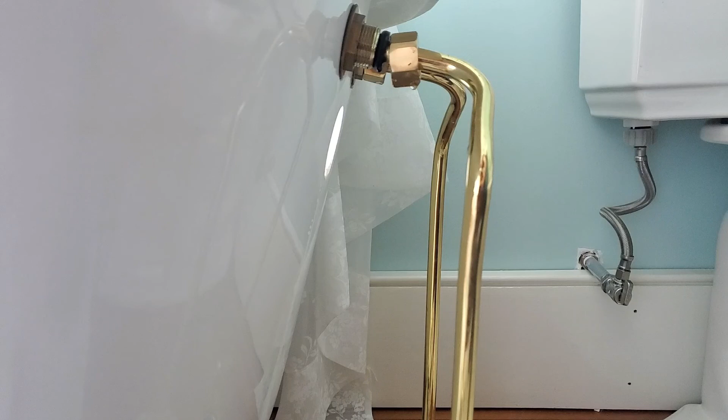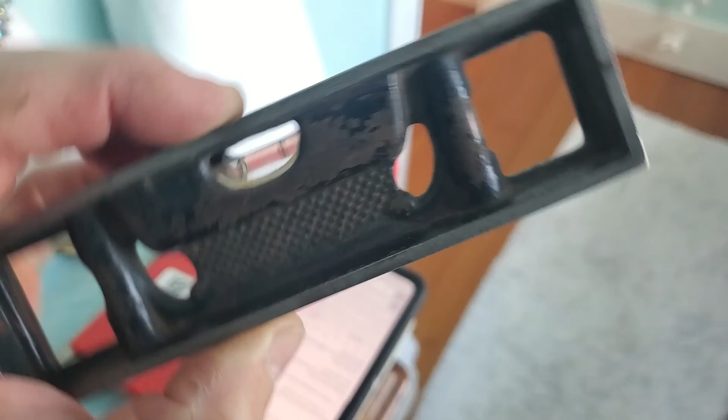Okay, we have a slightly oval hole in the tub, 2 inches wide by 1 7/8 tall. And we have to get the angle of that back face of the tub relative to vertical. I'm going to use a combination of my protractor and a Starrett level, which has bubbles on both horizontal and vertical axes, to estimate the angle from vertical.

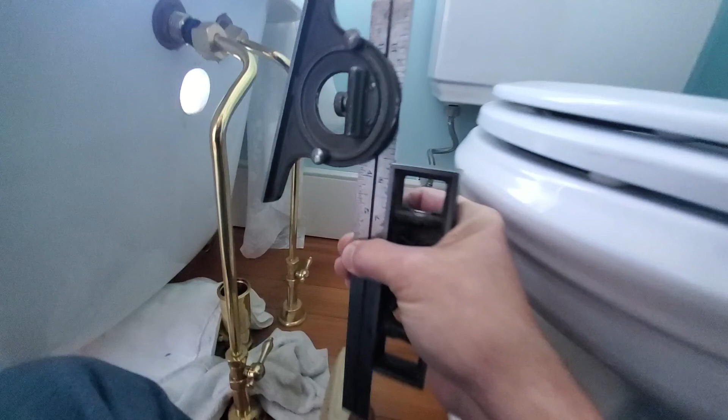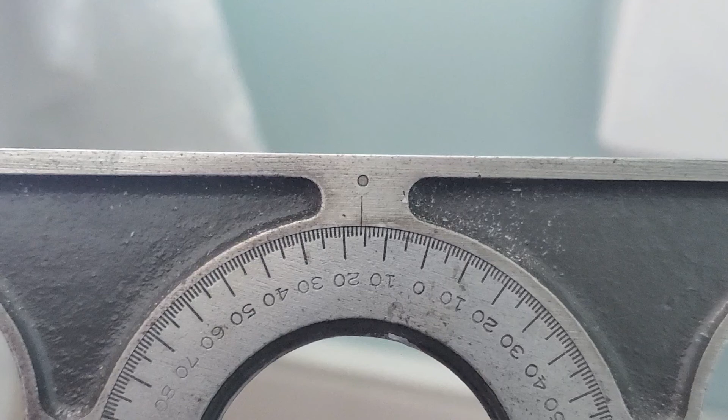Okay, here's the crazy setup I used to determine the angle of the back of the tub relative to vertical. I used both hands, and I was able to tighten the adjusting screws on the protractor using the level as a reference for the blade. And I got a result, if I could zoom in here, of 16 degrees, which is more than I thought it was.

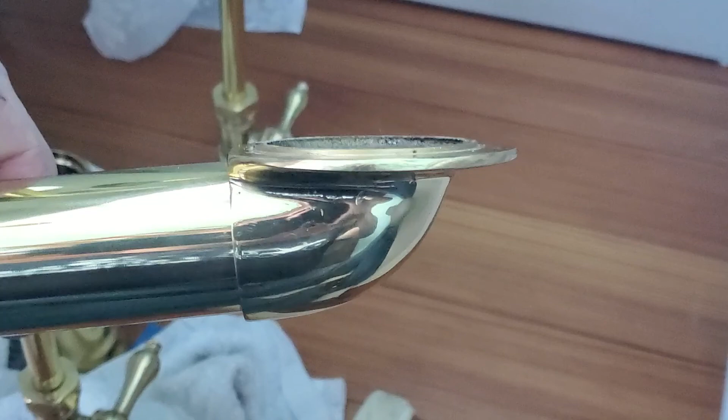So the angle of the discharge pipe is no more than a couple degrees. I'm going to take this down and measure it a different way, but then the difference between those two is the angle of taper of the wedge that needs to go between these.

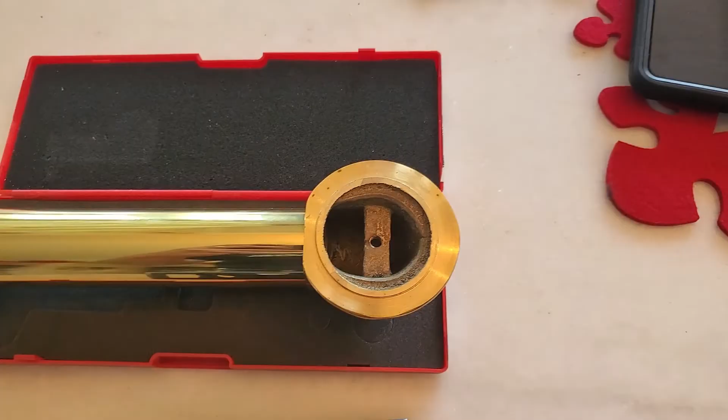Using my perfectly level kitchen island as a reference, it is level because I built it that way. We have a little indexing pilot here. It's 2.234 by about 43 thousandths deep. So our brass piece, I'm going to match this diameter, and I'm going to put the little pilot in this so that this will index together.

I think I'll use an RTV or maybe a Loctite gasket sealant between those two. So what's our OD? 2.96.

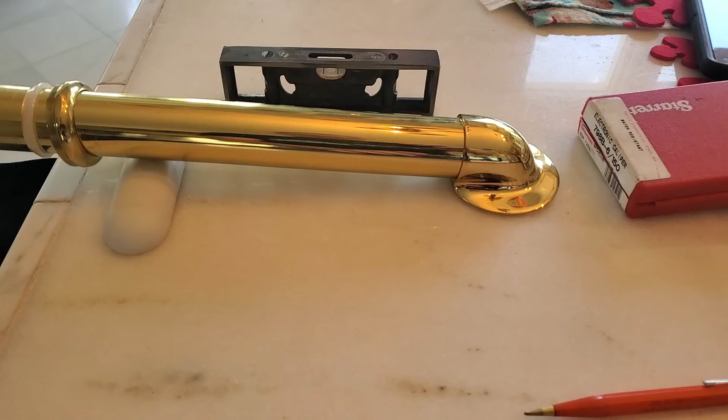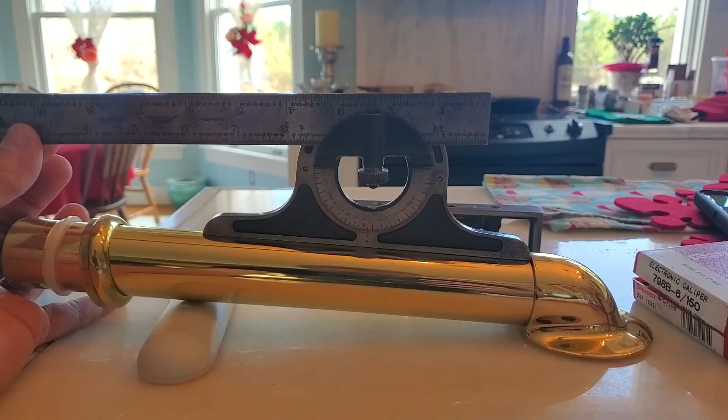2.96, and then we've got a flat here, but that doesn't matter. From my level reference, I've got this blocked up to where the flange is sitting flat. So I will set up the protractor and get a level surface again sitting on top of this and measure that angle of this face. There's our difference, and that looks like 4 degrees, maybe a hair more than 4 degrees.

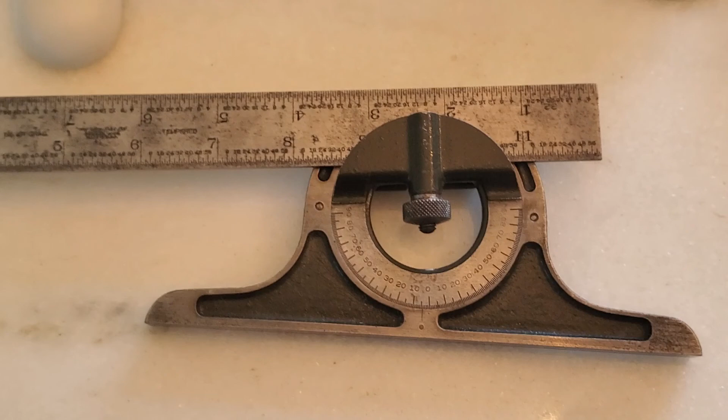So the difference in the angle, what did I say the first one was? 16 and 4. So we've got a 12-degree angle we have to machine into the brass wedge.

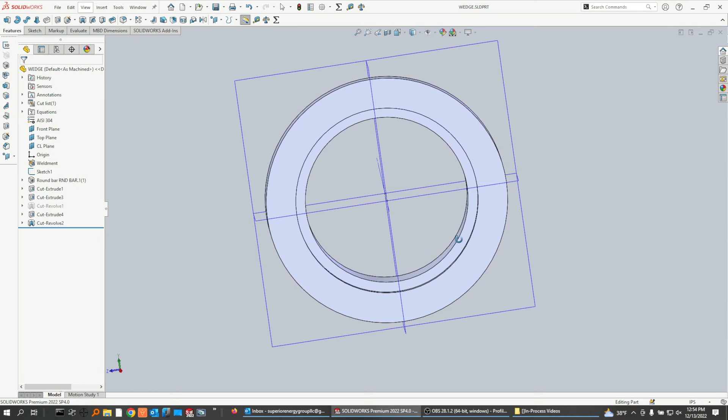Okay, so here's our finished little brass adapter washer slash wedge. The features I have on it on the back side, this is the side that's going to mate up with the discharge tube. I've got a step milled into the ID. This is a 2-inch ID, and this step gives about 5 to 10 thousandths clearance over that stub sticking out of the tube. And the OD matches the OD of the tube itself.

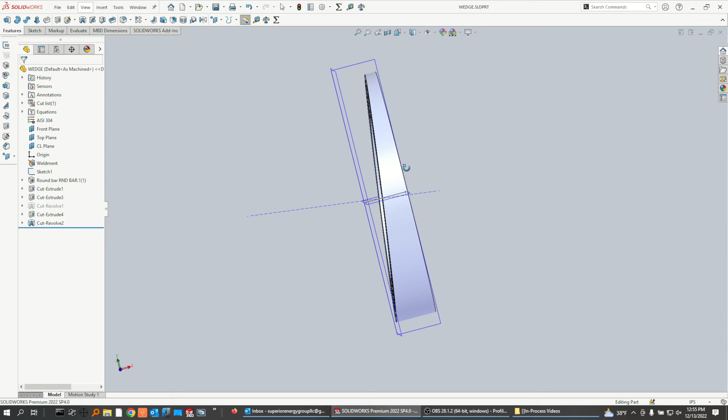Now on the other side, I milled a series of concentric grooves. They're concentric in that they're about the ID, which is a perfect circle. Once you slice this thing on, I think it's an 11-degree angle, I'll put that in the notes if it's any different. These are going to be slightly wonky looking relative to the ID, but not enough to notice really.

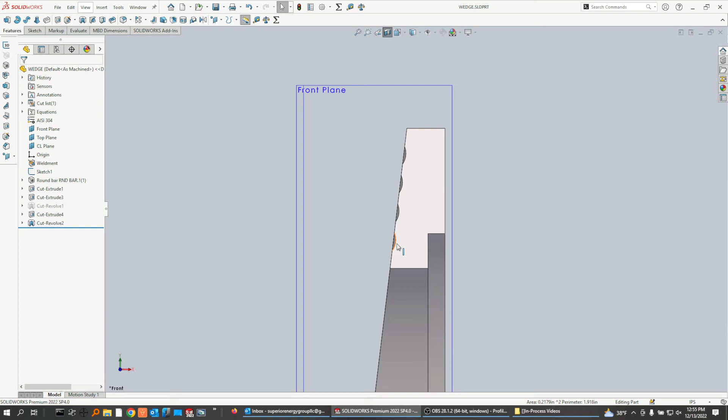So this thing, let me show you what this looks like in cross section. I've got these, and they're only 8 thousandths deep. These are made with an 1/8-inch ball end mill. And the purpose of these is to bite into the rubber, like it's a foam gasket that's going to go in between the tub and the brass piece here.

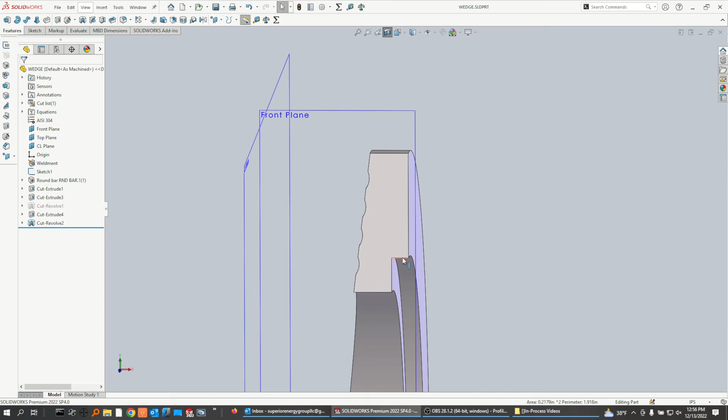And so they're going to bite into that gasket, give it a little bit more compression on the gasket. I think I'm going to use a Loctite 574 on this back surface and in here to permanently stop the gap between the discharge tube and the washer to make that leak proof. And then this gasket will take up any minor irregularities we have in the diameter, in the angle between these pieces. So that's what we're going to machine.

It's going to be a challenge to hold it, but I've got some fixturing that I'm going to set up in order to do it, and let's get on to that now.

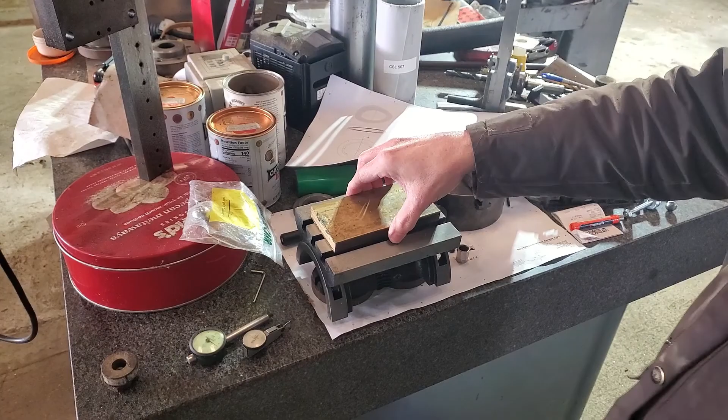I have a piece of material I bought from McMaster Carr. It's a 5/8 thick piece of brass. Expensive, this was like 60 bucks. I'm glad I got 5/8 because of the amount of taper in there. I'm going to be going from full thickness down to almost nothing. And to get the angle established, I bought one of these, the cheapest tilt table on the internet.

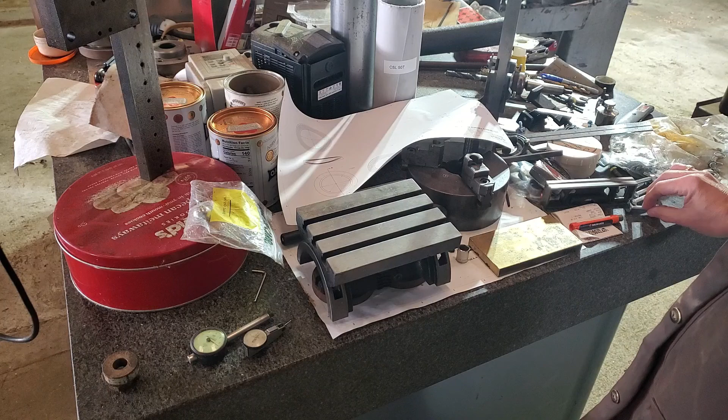This is a little made-in-China tilt table, 5x7 size. It works pretty well with these 5/16 carriage bolts as, you know, light duty means to clamp the brass to the table. I'm going to square this up, get it level with the travel of the table, make sure it doesn't rock. I'm sure the accuracy of this thing is not great, but if I tram it across and get it reading zero with an indicator, I'll be able to use the Starrett level and my bevel protractor here to get that 11-degree angle duplicated.

I've got features on both sides that I have to work with. So the first thing I'm going to do is pop a couple of holes in the piece of brass, and I'm going to clamp it down diagonally opposite with a piece of Luan plywood in between. I got to cut that to size, and then that'll let me mill down without milling into my super expensive surface here. And for what I got, until I can afford a better one, this will suit me.

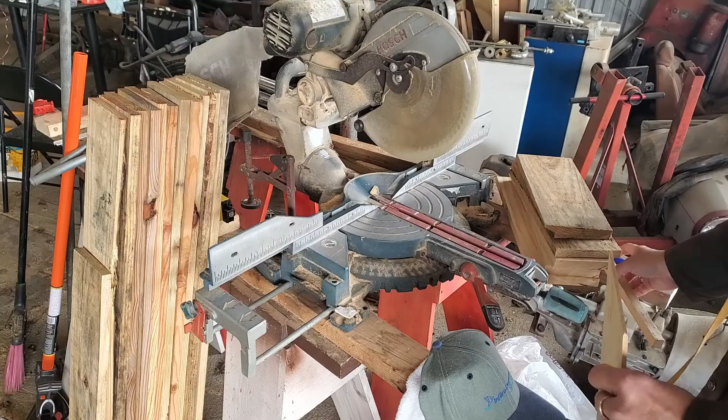Saw is cold and sluggish this morning, like me.

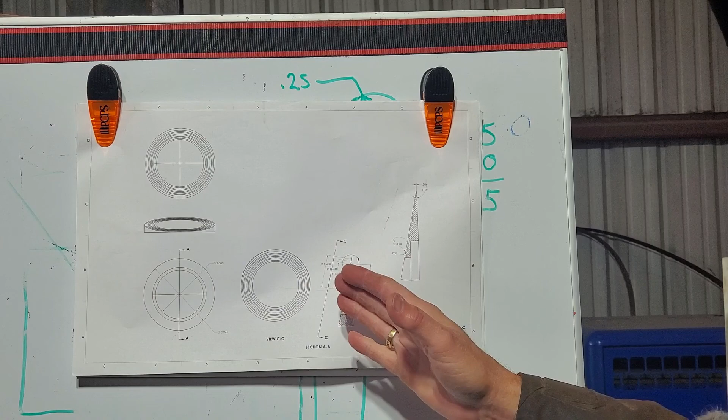Well, the actual model looked a little bit better than the drawing did, because for the model I had a static angle of 7 degrees built into it, but when I changed it and did the actual measurements, I had to update the drawing, and this thing almost comes to a knife edge. I have really only about 4 thousandths thickness at the thin side. So what I'm going to have to do is probably cheat that 11.8-degree angle, keep it closer to 11 degrees, 11.2 degrees, and make sure I don't run out of material there.

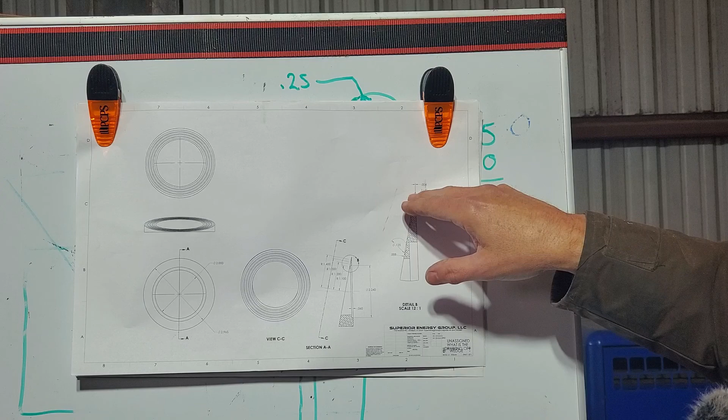I have features on both sides, so I'm going to be putting the 2-inch hole in first, then the counterbore. Then I will flip the part, and I'm going to put in a witness circle identifying the diameter, so that when I tilt it at the 11 degrees and change, and I start cleaning off that taper, I'll know when to stop.

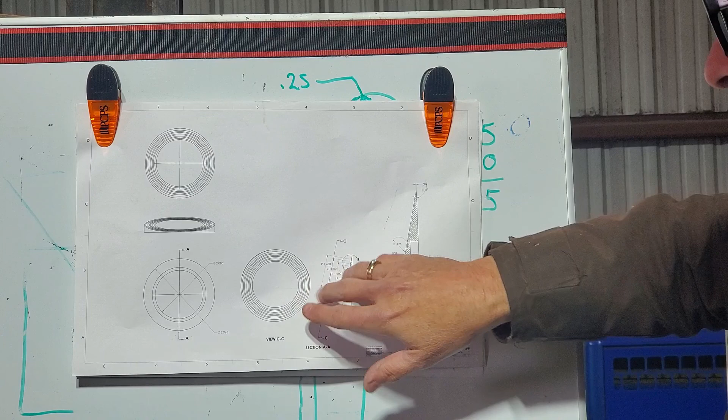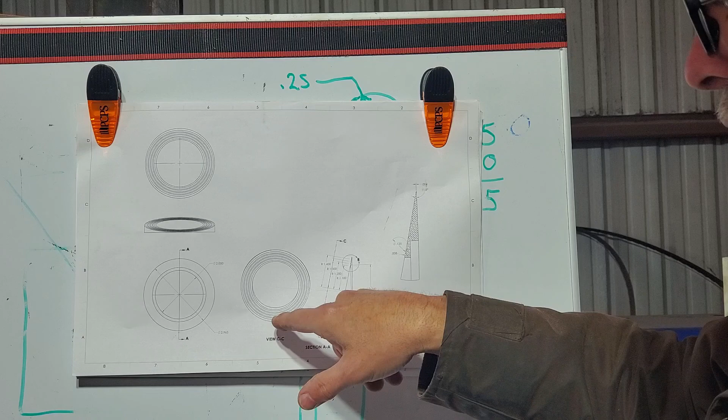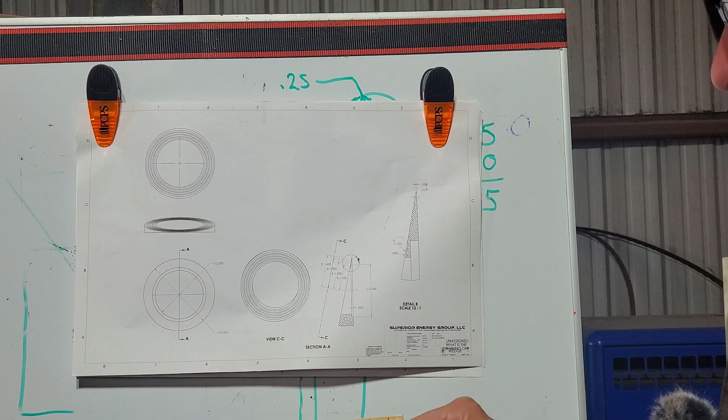As soon as I come up against the high side, I'll be able to stop. Then I'll put in the little 1/8 inch grooves. Then I think I have to square up the table again, and begin to mill through and catch this piece so I don't nick or mar the OD, because the OD is going to be a polished, finished, visible surface. Got to be careful, got to not waste this expensive material, even though technically I do have twice as much. I could do a second attempt if I screw up the first one, but I don't intend to screw up, because Christmas is coming.

So let's get the setup going and get started on this. First operation: drill a couple of holes to mount it at diagonally opposite corners, and do this without drilling into my vise.

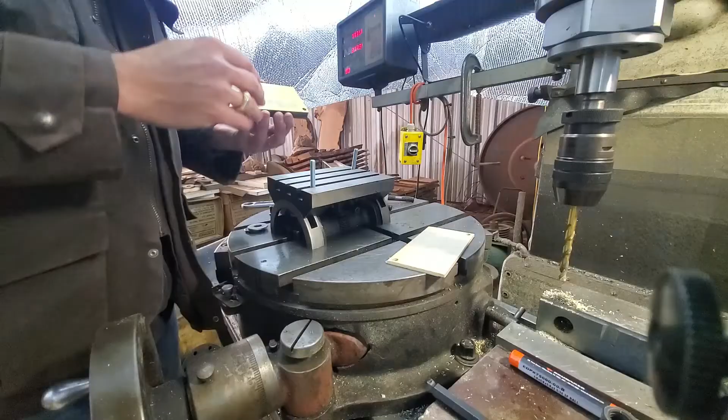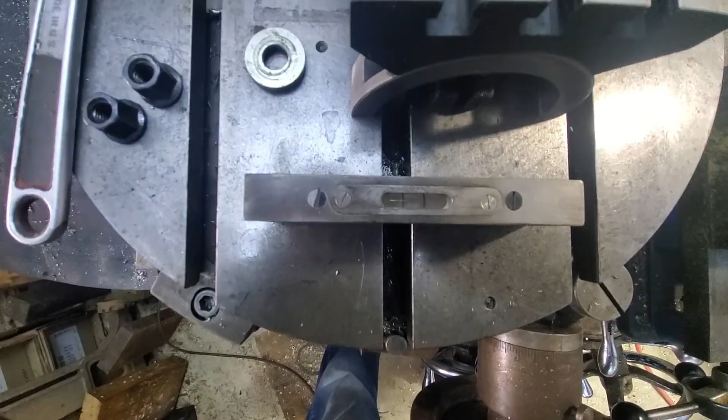Now let's see about getting this clamped to the table. I don't know if you can see that. So we'll just eyeball that.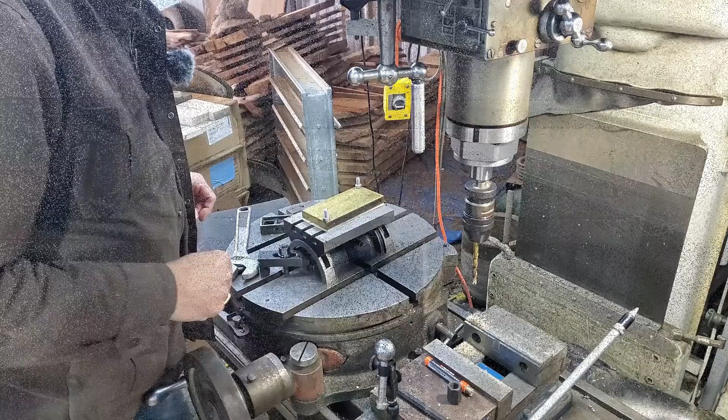For the tilt table, we'll run an indicator on it. Okay, I'm clamped down. I am not tight at all on the actual table, and that is eyeballed with the bubble, the same as I was getting on the rotary table. So let me snug that, and we'll tap it in from here.

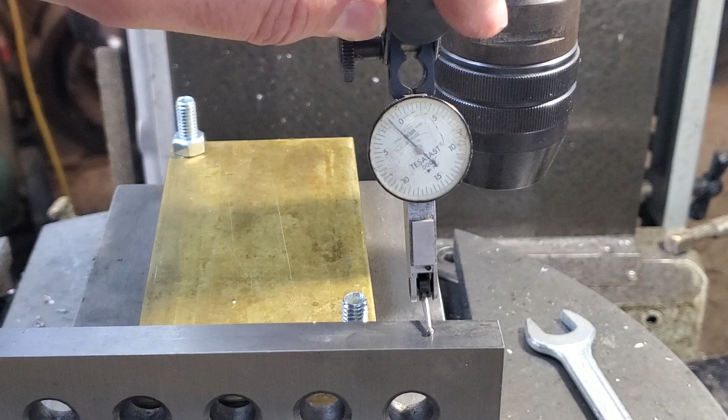I'm going to use a parallel here so I don't have to hop over those T-slots. My first guess is within a couple thousandths over 4 or 5 inches. I'd say we're looking pretty good.

Everything that I'm machining can be done with 3/8 shank tooling. So I've got a brand new ball end mill, and I've got a brand new 3-flute.

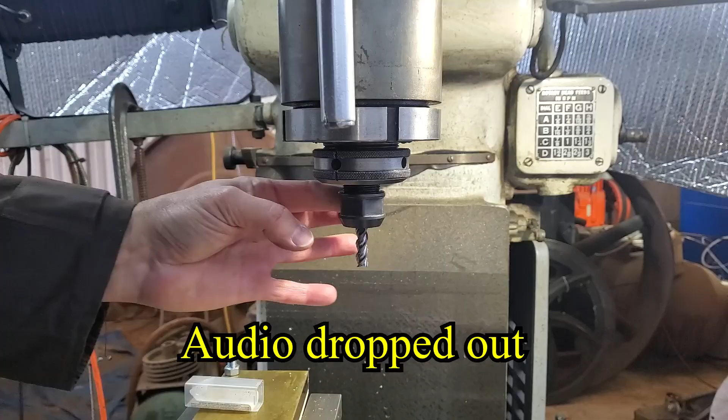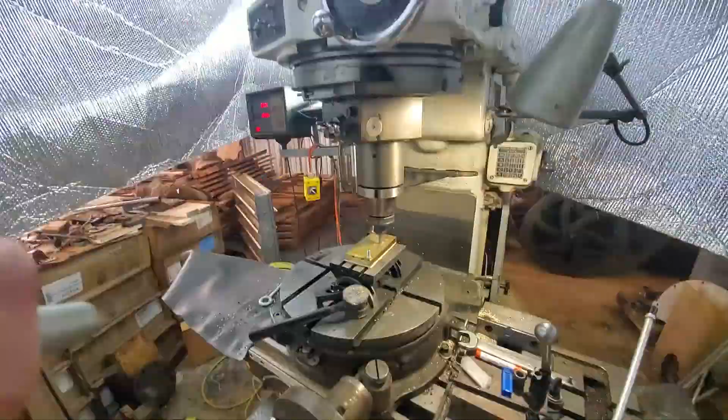For the next couple of clips, the audio for some reason didn't work. So what I'm basically doing here is trying to establish the center of the brass piece to where, when I cut out the actual bushing, I'm going to land entirely on the piece, because with that 7-degree angle, it does make it a little bit wonky. So I started out by milling the ID, which is a 2-inch ID, and then following up with all the features based on that as a reference.

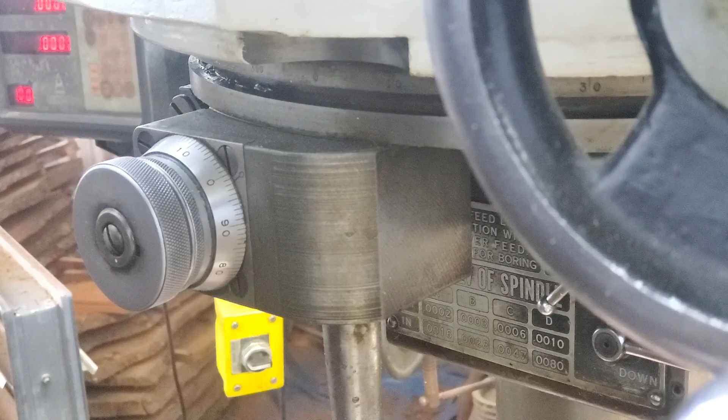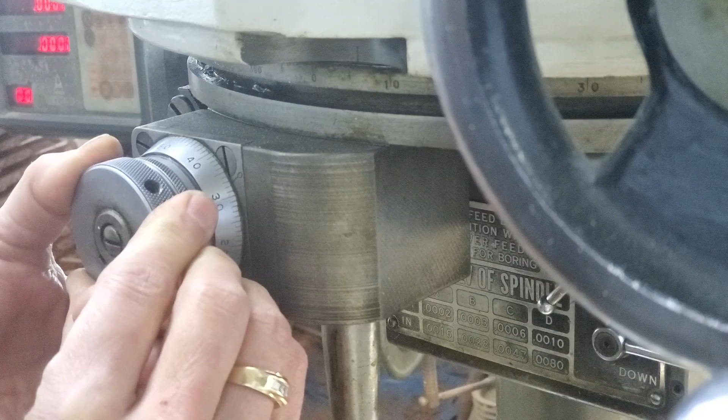So I'm going to bring this around. I'm going to bring the cutter down until we contact the workpiece, and zero the quill. I'll do this by hand, elevating the knee. To get a feel for this, I'm going to loosen the quill so I don't have any resistance. There, we're in contact. So actually I'm going to drop the knee 2 more thousandths and we'll be at 0 on the quill.

Okay, so now it's a matter of dialing in 60 thousandths depth of cut, and I'll do that while the head is in motion.

Okay, now it's time to flip the part over, zero it, actually tilt it, and then zero it.

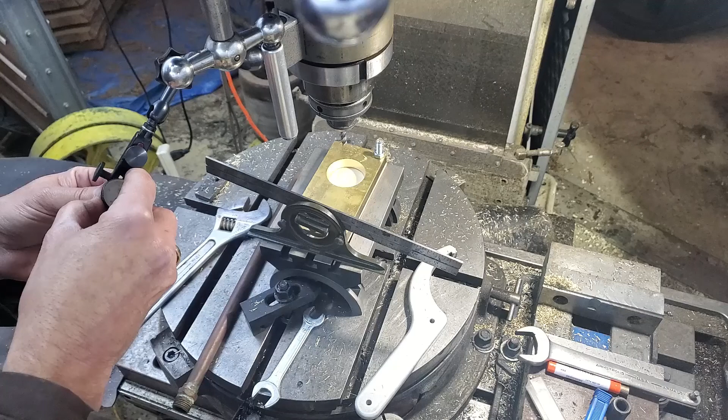Okay, logic would dictate that if I've trammed this table, this surface on a parallel, and it is perpendicular with the cutter axis, then if I establish the 11, theoretically 11.8 degrees, and like I said, I'm cheating that a bit - I'm cheating it down to about 11.2 degrees. See if you can see this. 11.2 degrees. That if I tram the surface of the blade and get that to 0, then that is the correct angle. So I have to loosen my trunnion.

I guess I need to do this eyeballing the bubble on the level just like before, and that is pretty close. I'm going to have to change the way I clamp this because the nuts are running into the hold down dogs.

Well, that's within a couple thousandths over 3 inches. So now the task is to offset the cutter. Actually, first task is to zero the cutter on that 2-inch cutout, which is going to be tricky.

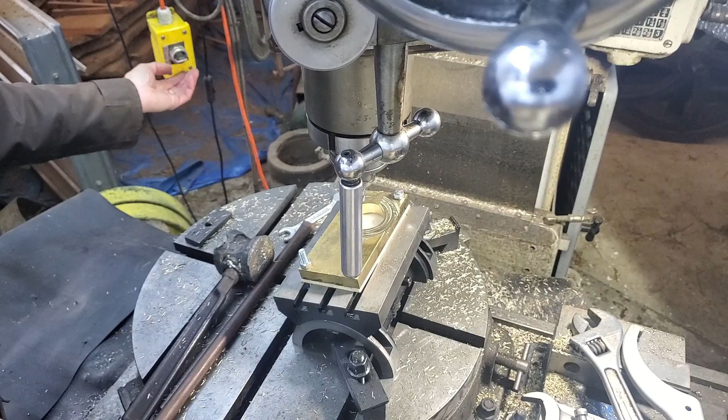So this is basically the technique, in and out and round until we come down to a finished thickness. As soon as I clean up all the way around the bore, I'll re-indicate. I trimmed off the bolts so we can proceed deeper.

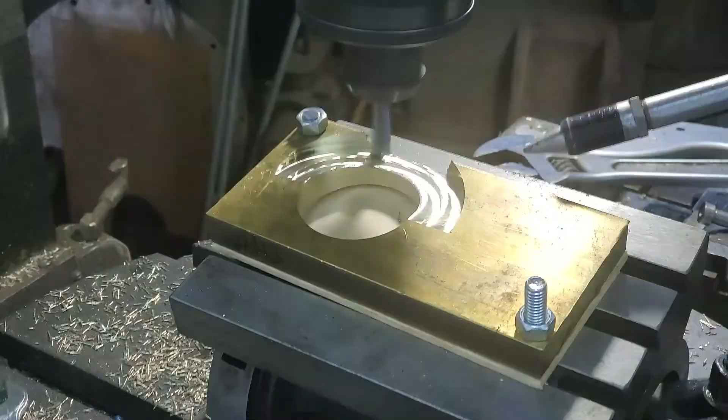At this point, the entire hole from this side is all on one plane, so I can indicate it, but it's actually going to be an oval, so I'm going to have to split the differences on the X and the Y.

Okay, I'm re-indicated, so I'm going to attempt to come down to the same depth and recut the OD. I'm going to call that a full cleanup.

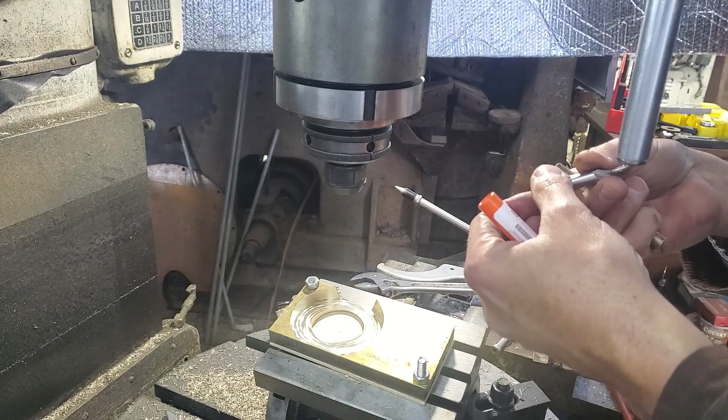1/8 inch ball end mill, 2 flute. Run this RPM on up there about 3,500.

Okay, there are 4 specific diameters, and I measured to the center of the spindle for each of these. Starts out with 1.100 and then steps out another 100 thousandths for each groove, so I can just put the spindle directly on that number. The thing I'm going to have to establish is when this little cutter is in contact with the brass.

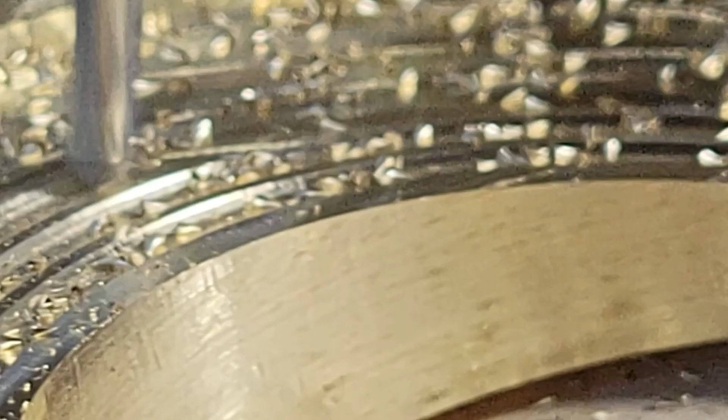The last cut cuts this part free, and the diameter is 2.967, I believe, 2.965. So I have the offset: half of 2.965 equals 1.4825 plus the radius of the cutter, 0.1875, equals 1.670. That's going to cut inboard of this. Unfortunately, it is going to cut into this nut just a bit. I oriented the flat to minimize that, but I'm going to do that first, make sure that doesn't move, and then we'll just continue working our way down.

And we'll go 50 thousandths at a time through the brass, and probably increase the speed. This is 1 RPM. That's a bit fast, I'm going to slow that down a hair. 3/4 RPM. Yeah, it's doing a full cleanup on that side, which is good. The visible side is going to be mostly this one over here.

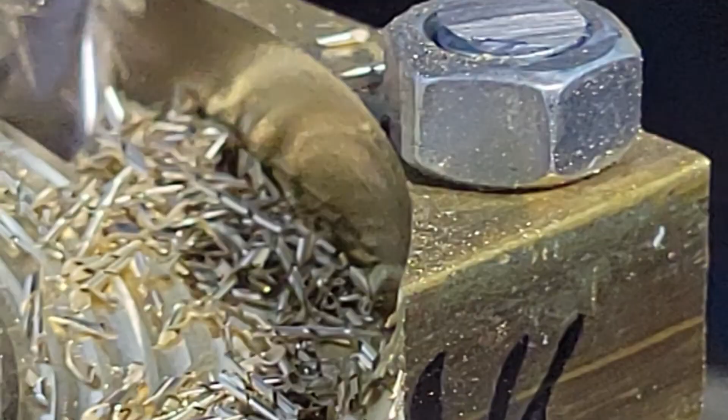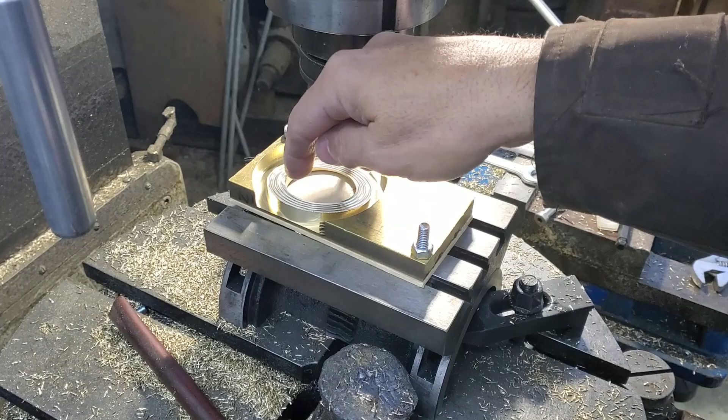To cut all the way through this, I'm going to lose my clamping from the 2 bolts, so I've had to improvise a support. What I'm going to do is cut through, along the x-axis of the table, all but a little bit of a web here on the top and the bottom. And then I'm going to bridge it with this wooden clamp that's going to grab the underside of the tilt table and bear down on the 2 parts of the ring in the middle. And then I can come back and just swing those 2 little arcs and cut through it.

So I'm going to plunge through and get into the wood. I think I'm going to slow the head down to decrease the feed pressure.

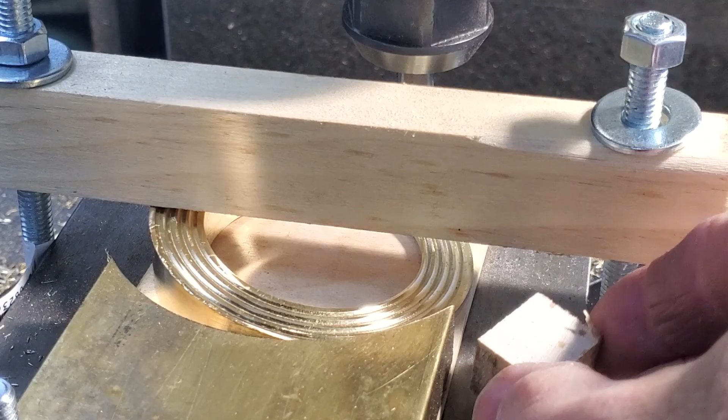Okay, see if we can complete this cut without it moving. I think I'm just going to crank it by hand, just kind of feeling lightly for any signs of movement. Once we go through, I still have to keep cleaning up for the radius of the cutter. Now I'm going to have to drop the knee to hop over this clamp. Back in contact with the wood.

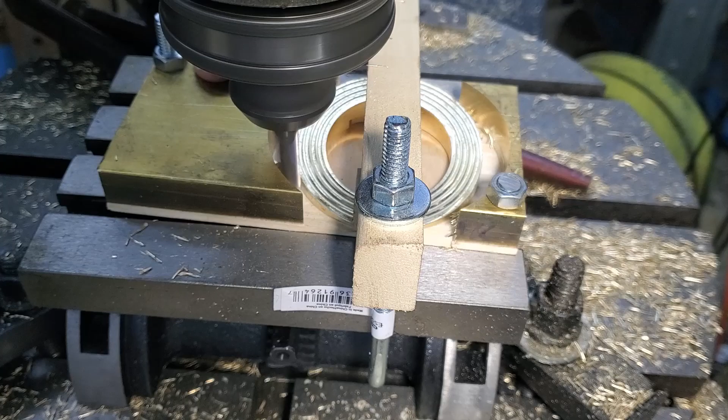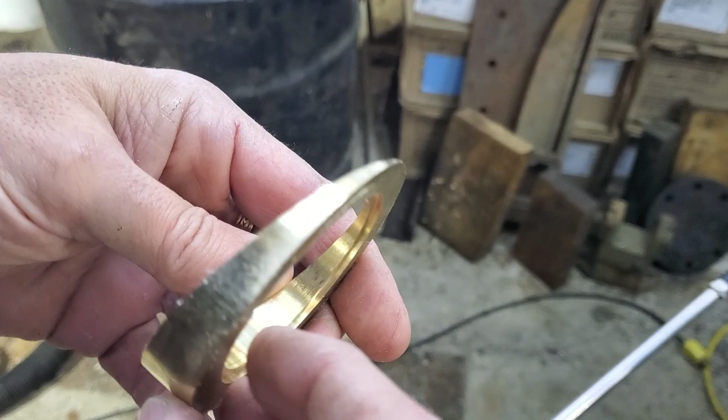Tiny bit of witness lines on the edges. That's not a big deal. Let's take this over to the buffer, clean it up.

Well, I hope you enjoyed that. That certainly was different. There's some little striations from going in and out of the cut, but I don't think those will polish out. I would have to literally sand this and take it through multiple grits and then go back to the polisher, but I'm going to lacquer it, and you're only going to see about that part of it, so it looks pretty decent, and I think it'll do the job for what we want it to.